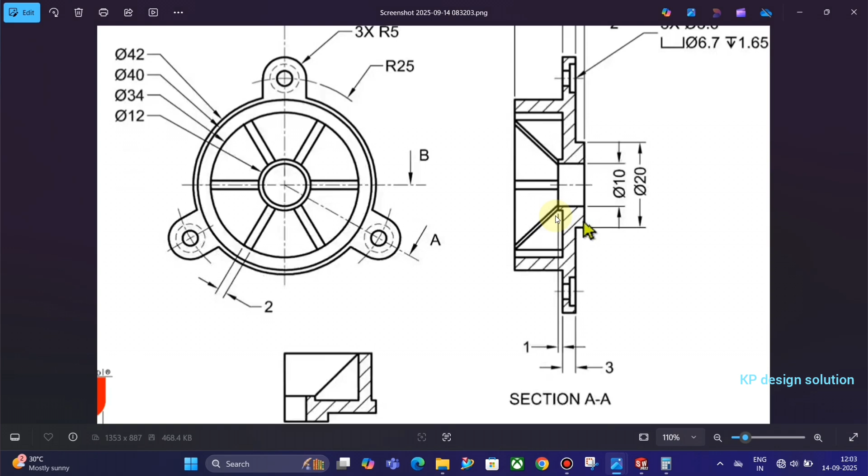So we are making this part. This part looks like a typical part, but if you follow my steps on how I make it, it becomes easier. Okay guys.

Now take a line, sketch this one, select here. After selecting this one,

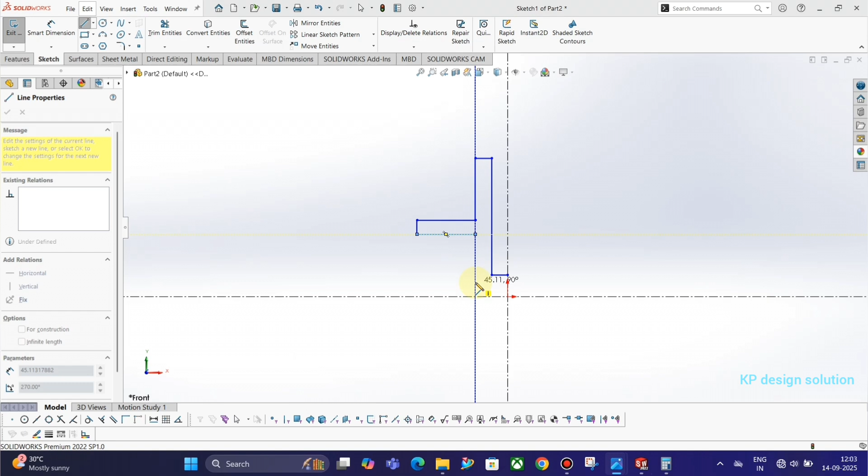now take a line, and I think first we make one side of the profile, then we revolve it around the center line.

This distance is 10 and this distance is 20, center line, and this distance... and take another from here. Its diameter is 20,

the height is 3 mm. Here the height is 3 mm, and

from center, the distance is 2 mm. 11.

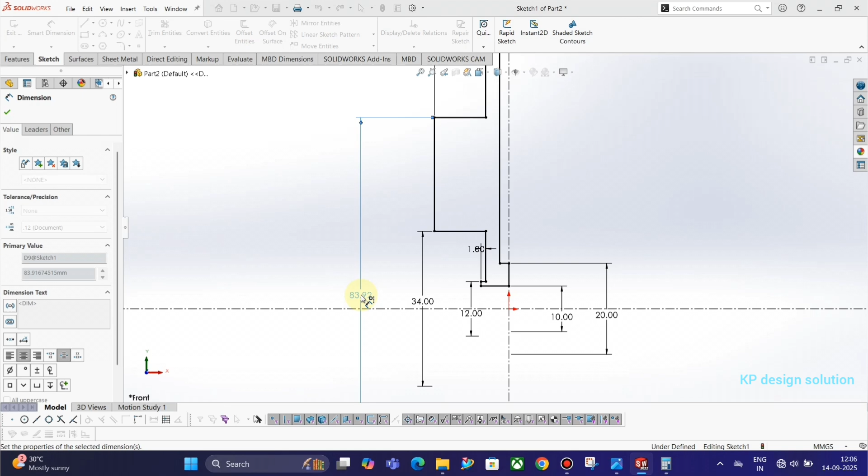This distance is 40 mm, and this total distance is 42. Oh wait a minute, it is 42. Okay,

we are making another slot. We are making the other slots. In these other slots, there are three handles around this cup.

We will make all three in the next sketch in this video, but in the next part. First, if we make these also, it becomes more typical. It's not hard for me because I will easily make it.

If you are a beginner, then there is an issue that could be created that you won't solve - you may be puzzled by this sketch.

This section A-A. Okay, this radius is 25. This diameter is 50.

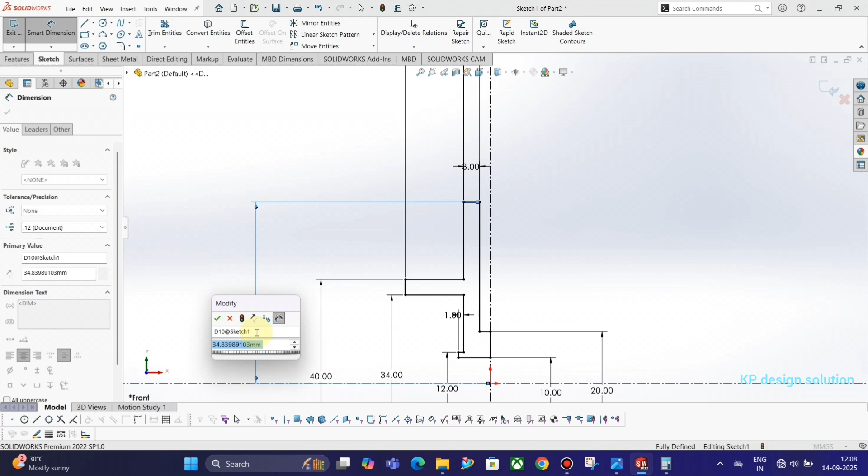No, this diameter is not 50. It is 25.

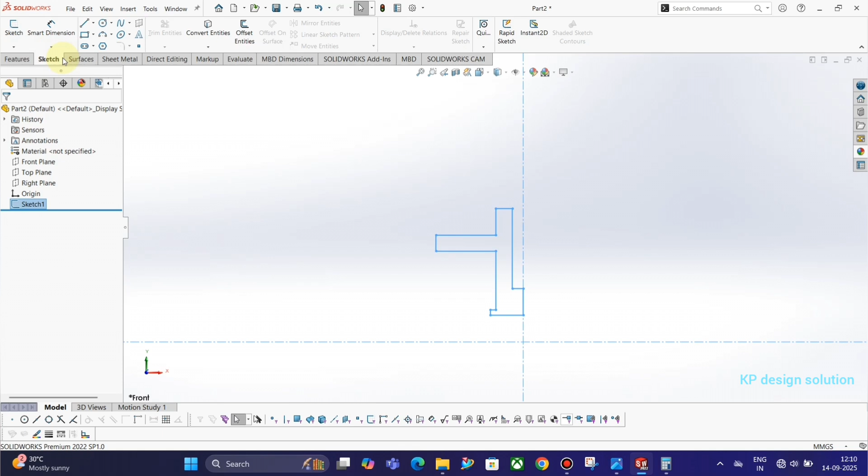What is the diameter? If it is 42, okay, it is 50. Okay, revolve command, revolve around this. Now, okay,

now our part is 50% complete, and we move forward to the next step.

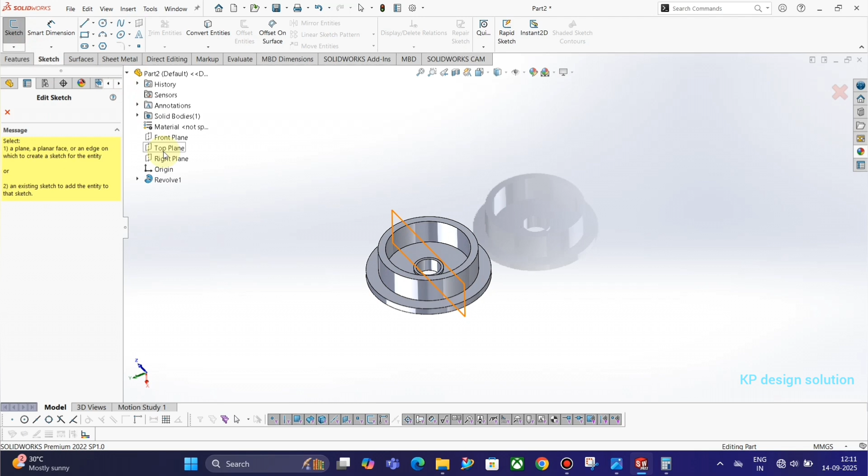Sketch, top plane, take a line,

come out from sketch, choose the rib command, flip material inside, 2 mm, flip material inside. Okay,

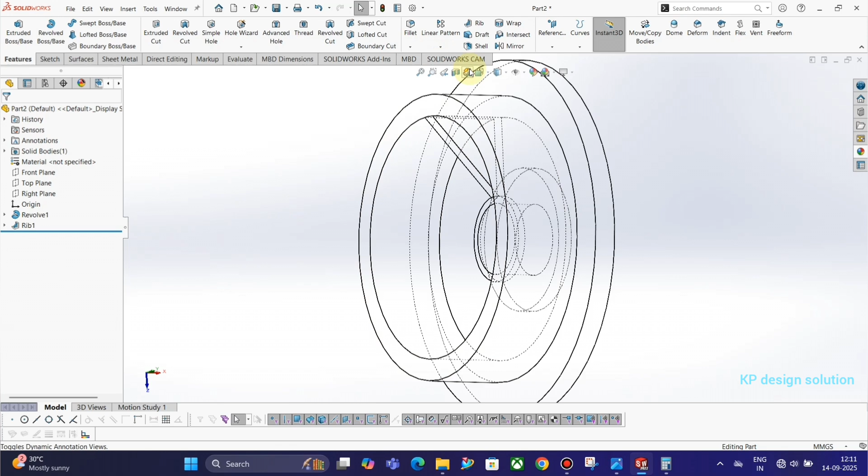now our part one dimension is completed. Then we rib circular,

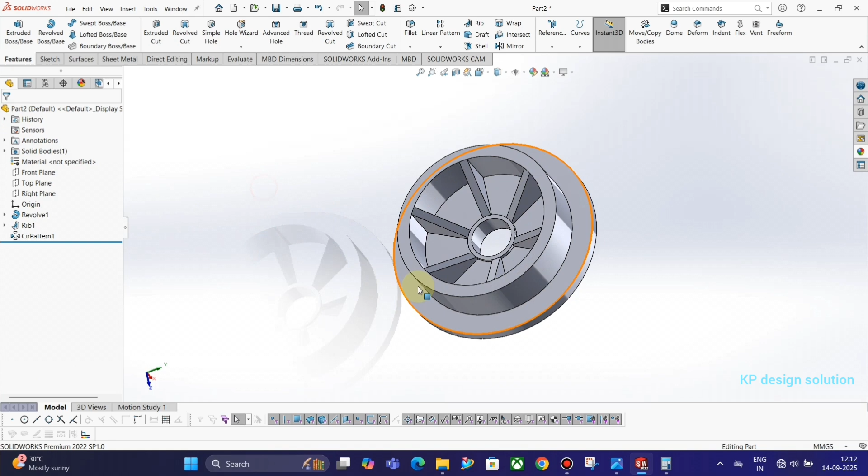1, 2, 3, 4, 5, 6, 7. We select all of them. Okay guys, do you understand? How easy is it to make this? How easy to make these type of parts?

Sketch. Maybe there is some mistake I will make. Guys, if I do any little bit of mistake when you are practicing this type of part, please

do it without error, because sometimes some type of little mistakes

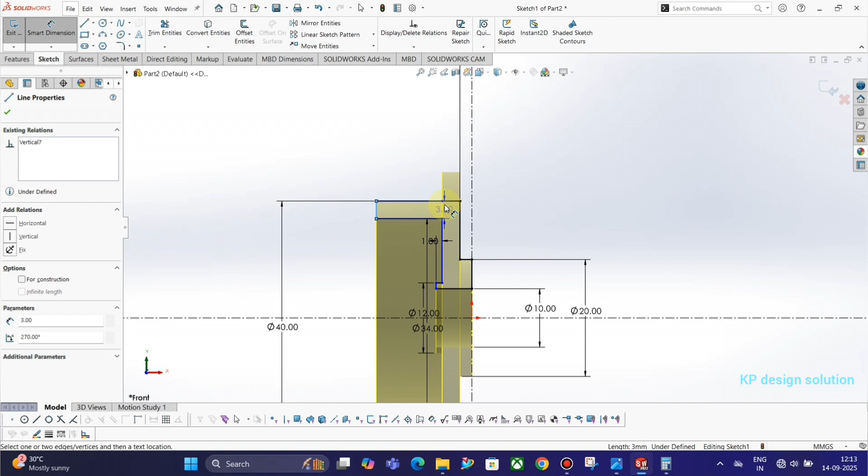create an issue during the full definition of our sketch.

So please, when you are making this design, please improve on my mistakes. Okay,

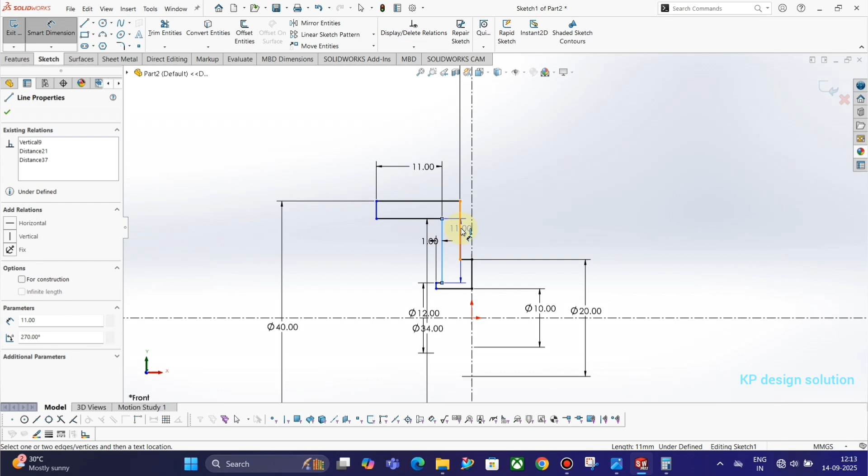and this height is 3 mm. Now come out from sketch. Now I think it is okay.

Now we are making three for holding the 3 points. Select, take a center line from both the x and y axis.

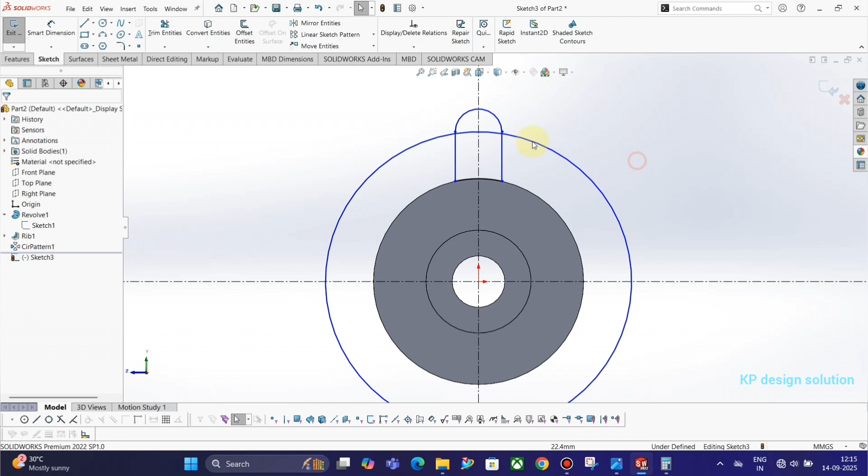Take a circle. Circle radius is 25. There are three holding points on our part.

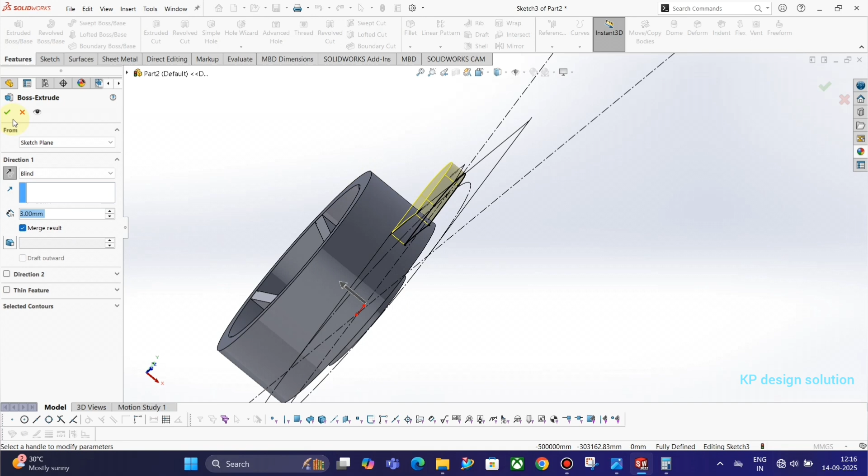Its distance is 10 mm. Sorry, 3 mm. Sorry, I think it is big in size. Maybe it creates a problem or not.

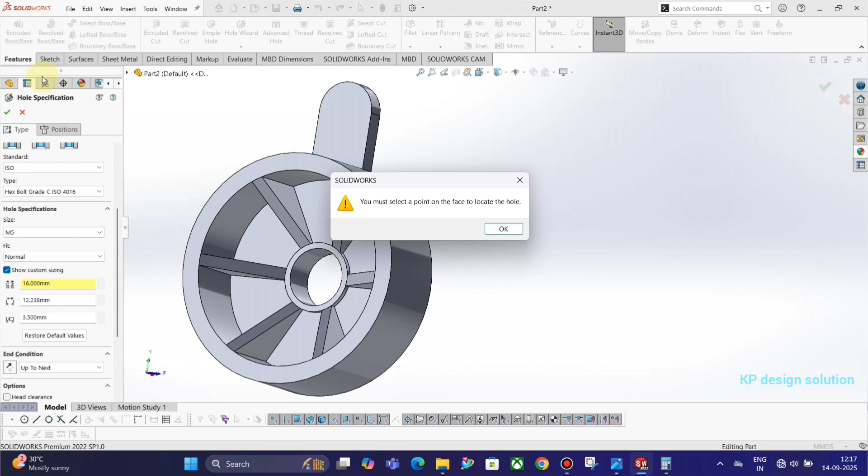Okay. Select the 3D sketch. 3.6.

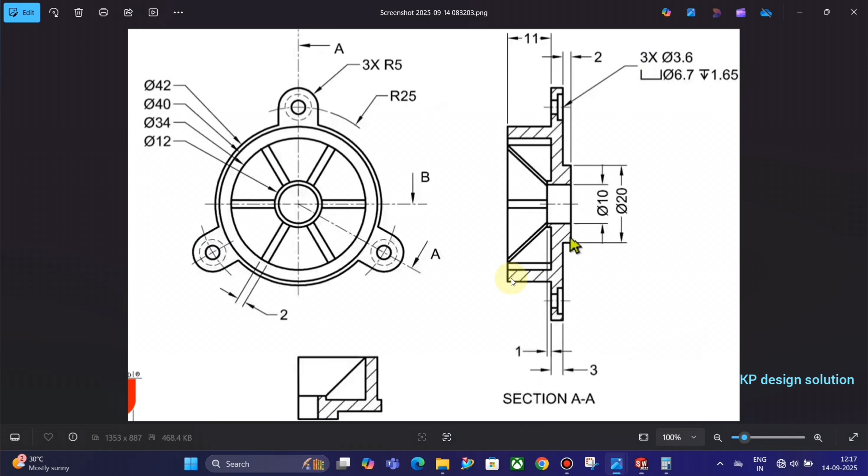Oh, it is a counterbore hole, na. 6.7, and depth is 1.65. 1.67.

Position 3D sketch. Select this one. Hmm.